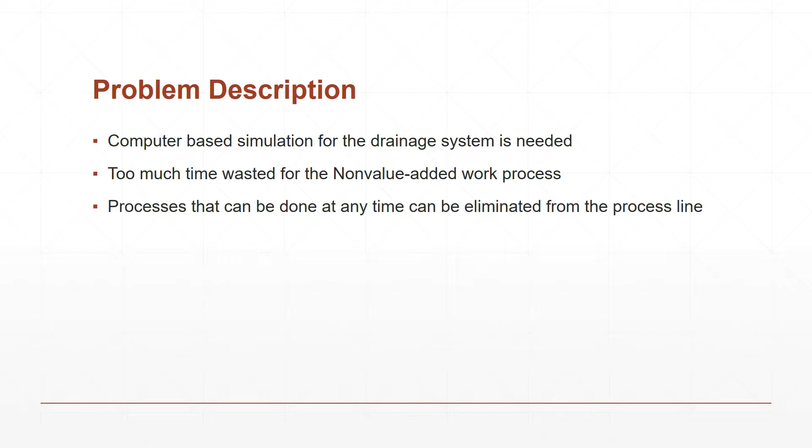And lastly, because some processes could be done at any time, we needed to eliminate those processes from the main process line to improve the whole process. The goal of this study is to use the computer simulation to detect inefficiency and apply the lean concept to improve the productivity of the drainage operation.

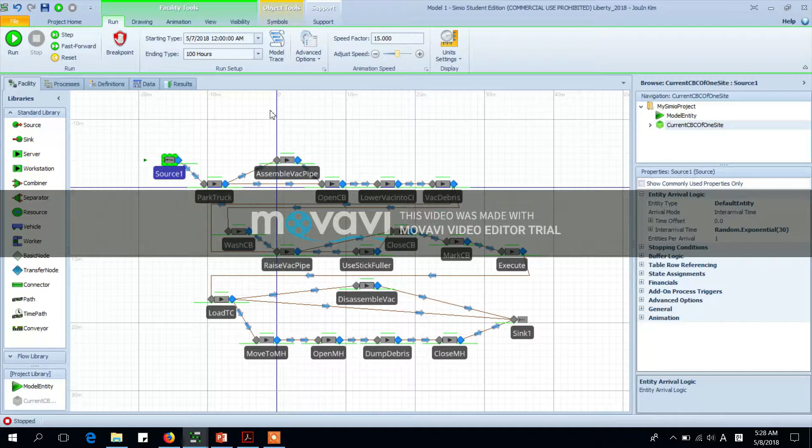Here, I'll be focusing on the CBC, which is catch basin cleaning of one site. This is just a part of the entire process. This is the Simio model of current CBC of one site. It has a running time of 100 hours and its source has an inter-arrival of 30 minutes. This inter-arrival time is just an assumed time. The actual inter-arrival time is shown differently. The model has 17 different servers. Each processing time is from the study.

So what is happening here is when the truck comes from the previous process, the work crew assembles the vacuum pipe into the basin to vacuum the debris. And if there's any unvacuumed debris, the work crew clears out the debris manually so that the sewage can keep moving to the next process. In doing so, both value-added process and non-value-added process are required.

Value-added process is composed of either operation steps or a combination of operation and inspection steps in which the basic work performed is valuable to the customer and advances the process. Non-value-added process steps are those steps that are not considered either an operation step or a combined operation and inspection step. Usually the problem with the non-value-added process is that it can cause waste of time. Mostly it's due to the transportation or work crew's unrelated works.

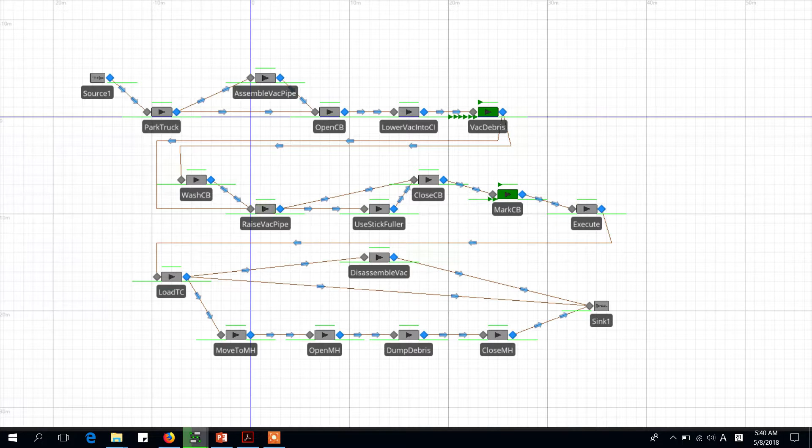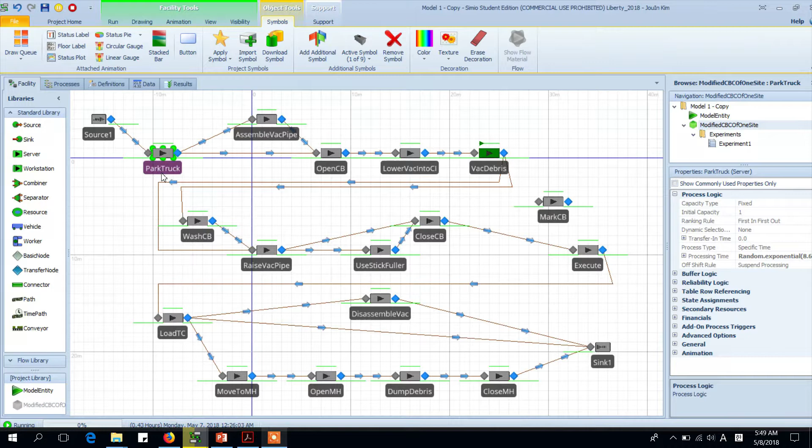However, it is hard to adjust many changes to this model, since the model is too saturated and complicated. We can only adjust the parking time. And the Mark CB is a process that can be done by any crew at any time, so it can be eliminated from the process line. So here we have a modified version of CBC of one site. The processing time of park truck has been reduced, assuming that the personnel training has been done to the work crew. And the Mark CB is off from the service line because it can be done at any time.

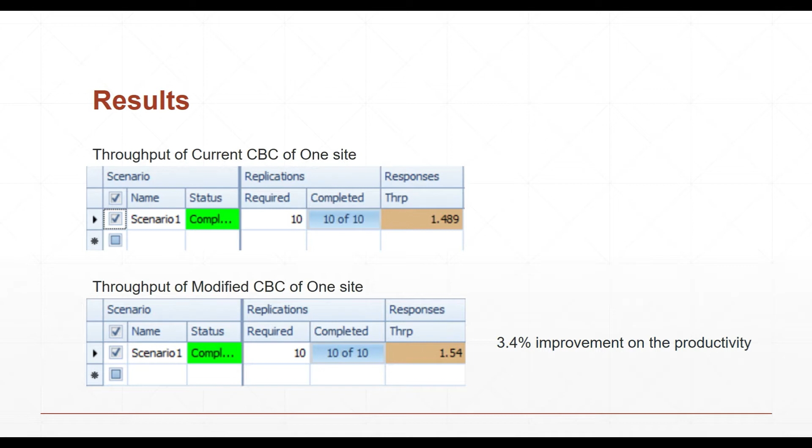So after I made the current and modified Simio model, I ran experiments with 10 replications for each model to come up with the throughput numbers. And based on the results, I was able to tell that the modified CBC model has 3.4% improvement on its productivity.

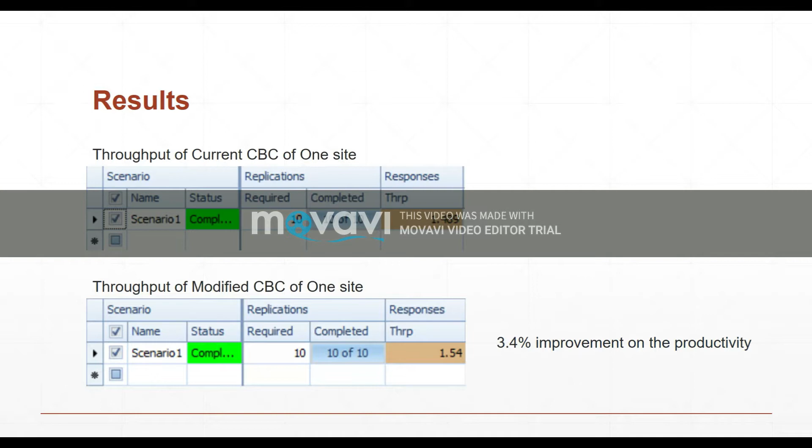There are quite a few limitations to this study. One of the most noticeable ones is that they didn't spend enough time on collecting actual data from daily work. So a lot of numbers in the simulation model were assumed based on probability. Thus, the modified version of CBC model needs more experimental implementation.

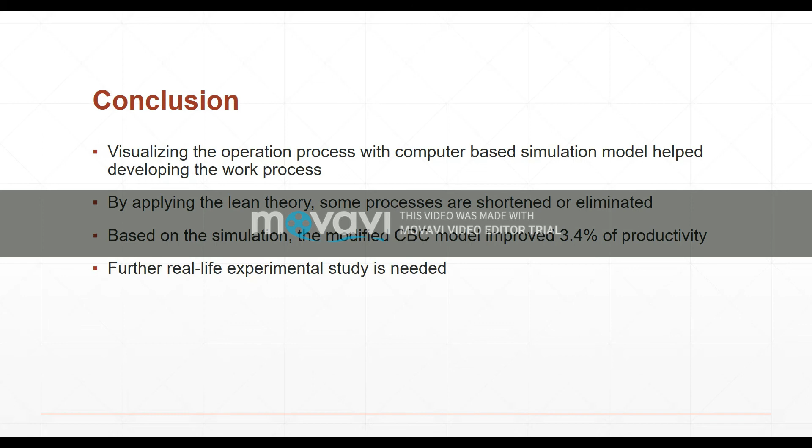Through the project, the drainage operation system of the city of Edmonton was visualized using Simio. By applying the lean theory to the study, some of the processes were shortened or eliminated. Based on the simulation model, the modified CBC model showed improvement of 3.4%. However, because this is just a laboratory experiment, more research needs to be done to come up with a more accurate model.